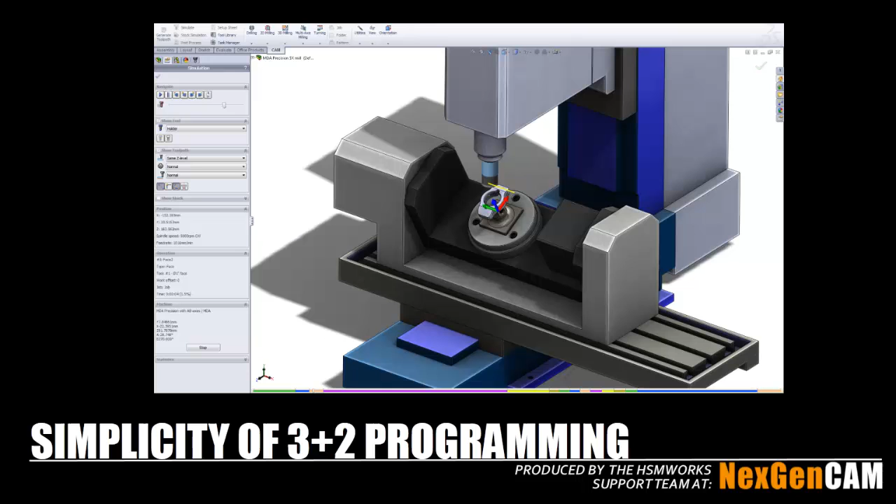In this video, we're going to look at 3+2 programming in HSMWorks. I say 3+2 because we're just using the rotary axes to position the part. Now HSMWorks does fully support 5-axis cutting, but the reality is over 90% of 5-axis machining done in North America today is really just 3+2 positioning. So we're going to focus on that for this video.

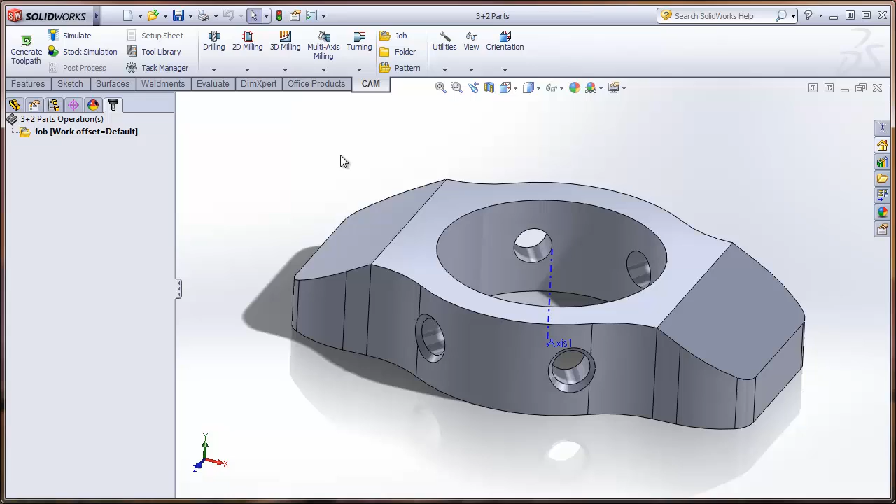When we're programming in HSMWorks, we can either program in part mode or assembly mode. In this video, we're going to program in assembly mode because I've already created a template assembly for programming parts like this. In my assembly, I have a dovetail fixture to hold onto the part, as well as a stock body saved as a virtual component. So I can use this template, drop in my new part, adjust the stock size with the confidence of knowing that other assemblies aren't referencing this same stock body.

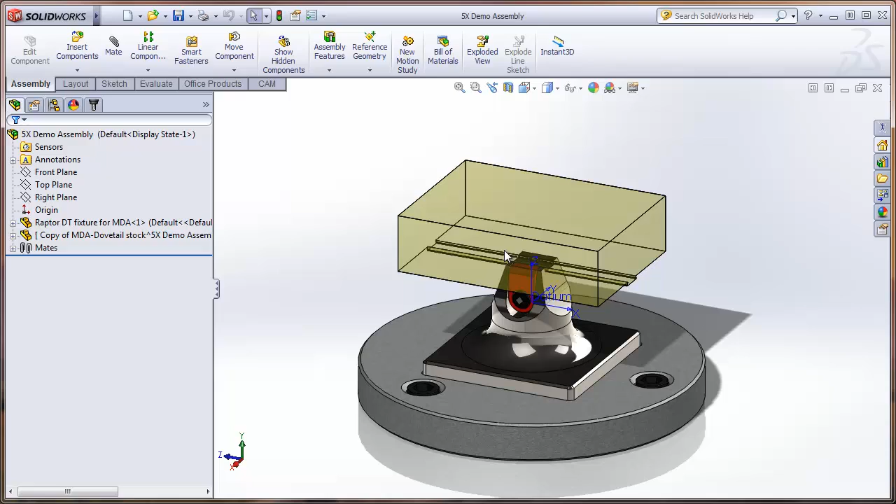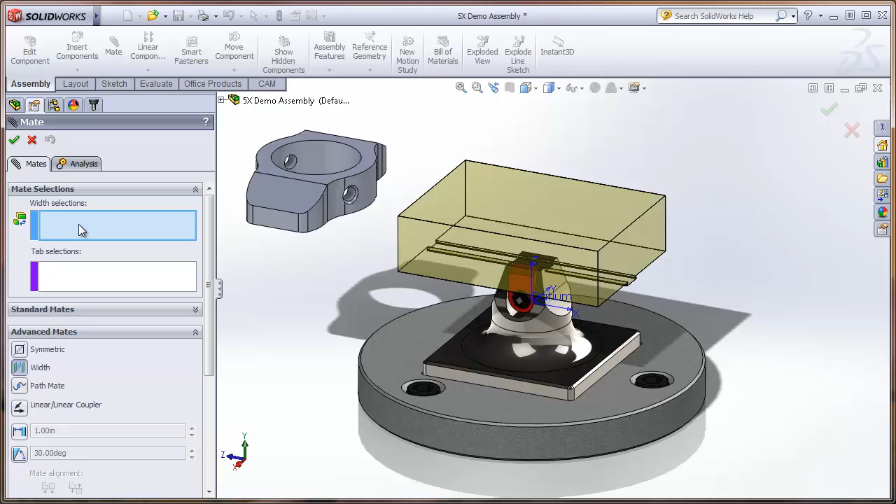With that said, let's go ahead and insert our part. I'm going to just drop the part in the graphics area and then use mates to center the part within my stock. The best mate to center one part within another is a width mate, and that's found within the Advanced Mates dropdown. I can select width and start by selecting two symmetrical entities on one of my parts. In this case, that's going to be the two outside faces of the part.

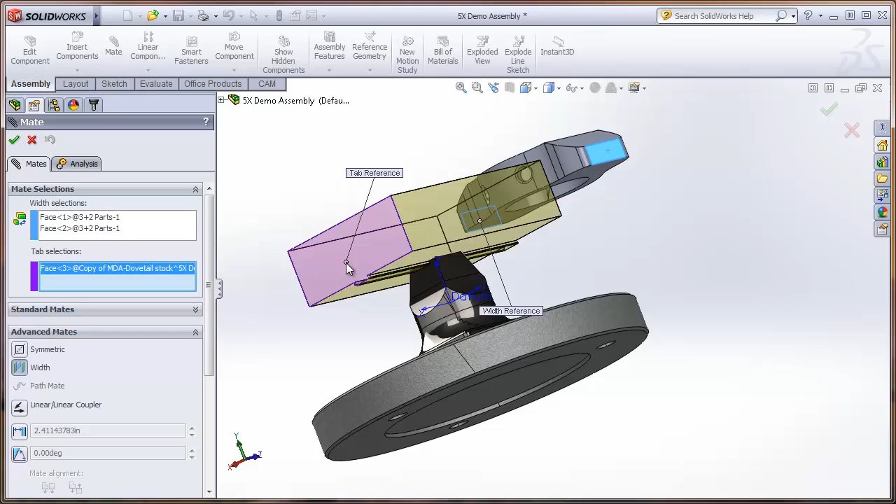The next thing we need to do is select two symmetrical faces or entities on the stock. So we'll go to tab selections, and because this stock is transparent, I'm going to hold shift down to get that outside face. You can spin around and pick the other outside face. So we can see what that's done is centered the part within our stock. We'll add this mate, and then we can do the same thing to center it the other way.

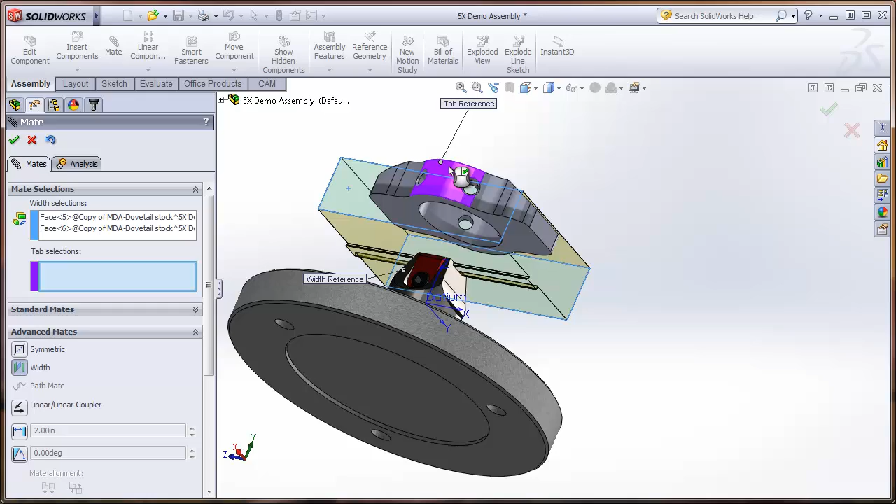A little trick for using the width mate though is we can actually use a cylindrical surface as well. So for the width selections, I'm going to pick the other outside faces of my stock. And then for my tab, I'll select the cylindrical bore of the part, and we can see that also centers that cylindrical bore within the outside faces of the stock.

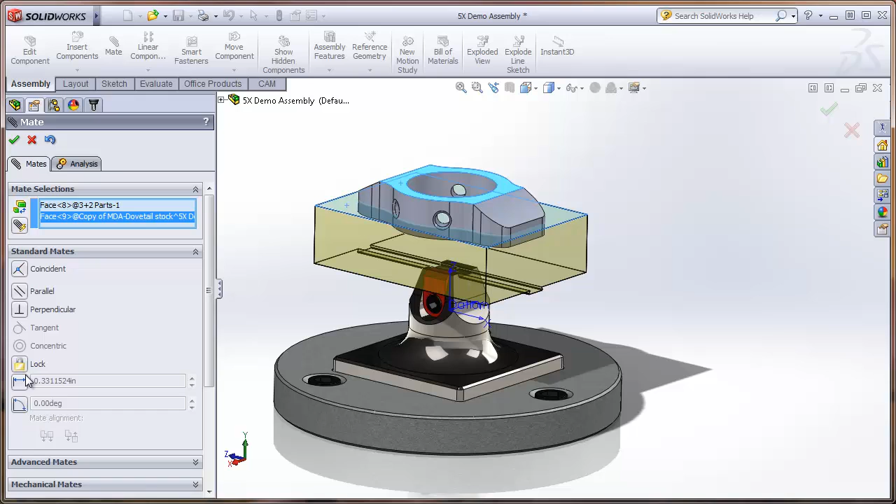We can hit OK, and the last thing I'm going to do is set the part down inside of my stock. So between those two top faces, I want to add a distance. I'll flip the dimension so it's inside of the stock, and just bury that inside of my stock body by 40 thousandths of an inch.

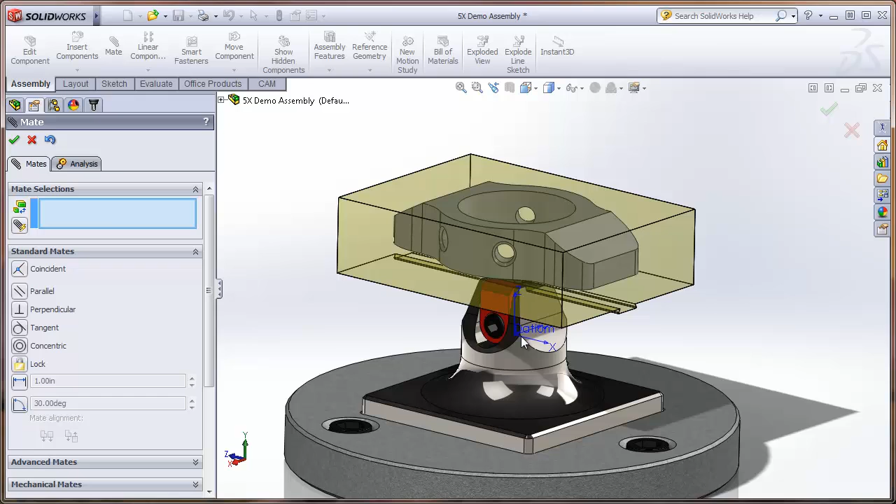So very quickly, I've inserted my part within the stock, and because I've created this assembly ahead of time, I already know where the center point of rotation is in relationship to my part. And it's time to start programming the part. So we're going to move to the CAM tab, and note that the other thing I created in my assembly template was a job that's already got the fixturing set up in it. So let's right click and select Edit.

Here in the job we can see the only thing that still needs to be defined is the workpiece we're cutting because we just inserted that workpiece into our assembly. So let's go ahead and select the workpiece and just quickly browse over what's already been defined. The solid body of the stock that I'd created is already defined, as are the fixturing components of the dovetail fixture and the datum at the center of rotation of the machine. Additionally, we've defined the machine that we're going to be using so that we can run full machine simulation. With the job set up, let's go ahead and click OK.